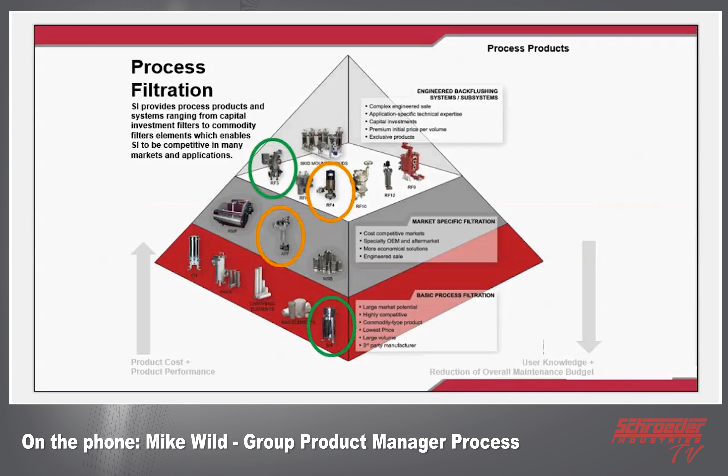So the main purpose today is just to make you aware of the other products that we have in so many different applications. Today we'll briefly go over the RF7, 9, 10, and 12. We'll talk a little bit about stainless steel filters that we have for high pressure and medium pressure applications, power booster blocks, basket strainers, candle filters.

Ryan mentioned the new PELF2, and we just had a seminar on the high capacity bag and cartridge filters that will be very important going forward, and they're much in line with the PELF2 as well.

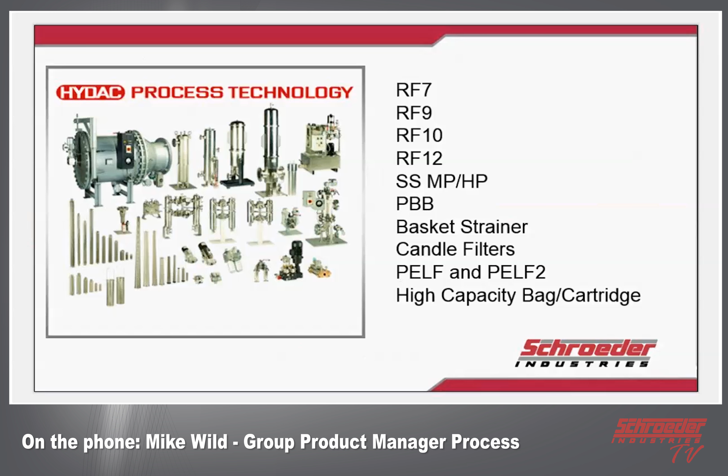In general, our process filtration area handles low viscosity fluids, low viscosity water, emulsions, anything basically below 10 centistokes. For the automatic backwash filters, we're looking at loads of basically less than 1,000 milligrams per liter. Anything higher than that, we look at stage filtration, maybe an ATF followed by an RF3, followed by bag filters to get the necessary rates.

Some of the items that we have don't necessarily fit into that mold. One of them is the RF9, designed for lube and gear oil, heavy oils, diesel, and we can do very high viscosity types of oils. This unit can range from smaller units that we put on lube and gear for central type systems, all the way through very large ones that do heavy diesel oil on marine and turbine applications.

We're also moving into hydrogen and compressed gases. There are some gray areas here with our fuels division, but in general we have GCF, which is a coalescing type filter for gas, and we're also moving into compressed gas applications, looking at different types of methane, some landfill applications before gas compressors. So we're trying to round out our division, to basically handle anything that flows.

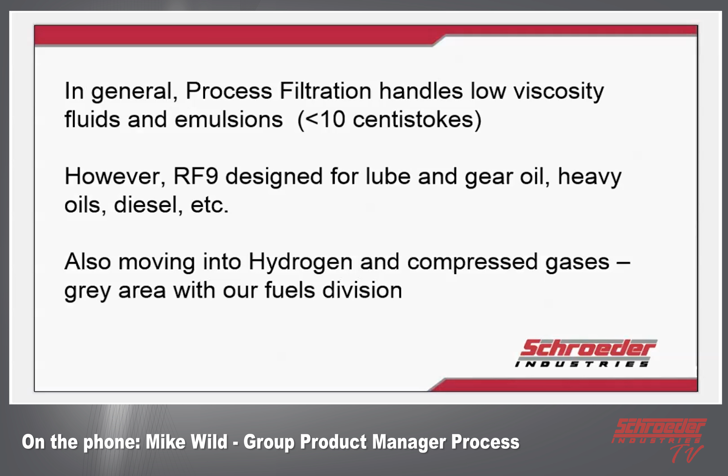To give you an overview of the variety, which a lot of you are familiar with, we have the RF3, the RF4, the RF5, and the RF7. What we want to highlight at this point, for what you may not know, is a little bit about the RF7, the horizontal filter.

All of these are comprised of the same premise of conical filtration with automatic backwashing of each filter individually. The RF7, how it differs and why you can apply it better to an application, is mainly due to its horizontal build. If you look to the top right above the gear motor, you'll see a little picture here.

It gets a little better in a few other pictures, but that is a lifting davit. The lifting davit is to help your customer whenever they are looking at a very large system, so they do not have to install an overhead crane lift, a very expensive overhead crane lift that OSHA will recommend for lifting that heavy lid. So what that davit does is save your customer money.

They can open the lid slightly, easily, and change access elements if necessary, which again is a rare experience, but it gives the customer the ability versus the cost of an actual crane. So that's one of the biggest things. The other thing about it is that it's very good for high flow. You can see the ANSI connection is on the very bottom as the inlet, and the outlet is on the side.

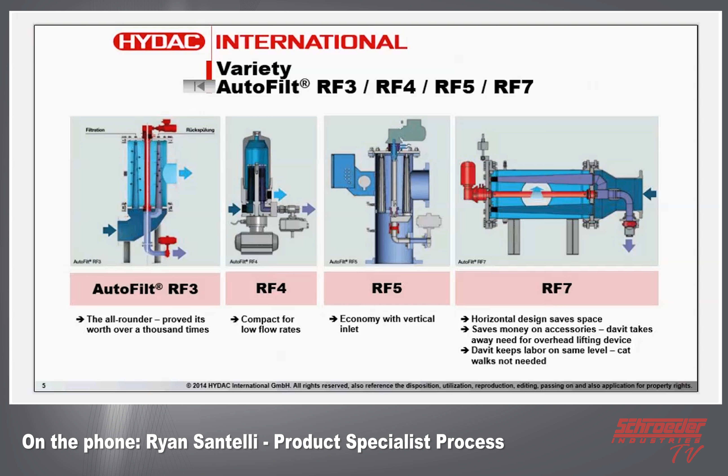Going into the RF10, this is a product that was launched a little bit over a year ago. Right now it's primarily being focused on ballast treatment, but we're going to slowly start introducing it to land applications for necessary items. The reason for it is because it has a high dirt holding capacity and dirt flushing capacity versus the RF3.

It has similar function as the RF3, except the difference is a conical jet flush technology. I'll get to that in a second, but it keeps the same theory of the conical filter element, the wedge wire from 50 to 3,000 micron. Your super mesh wedge wire is an option as well.

Your product advantages again are backflushing independent of pressure on the clean side of the filter, dependent only on inlet pressure. It's highly effective backflushing with low pressure conditions and long backflush lines. The other thing that's pretty cool about this item is that when it does flush elements, it actually flushes individual elements when necessary. It will not do a whole backflush of every single element.

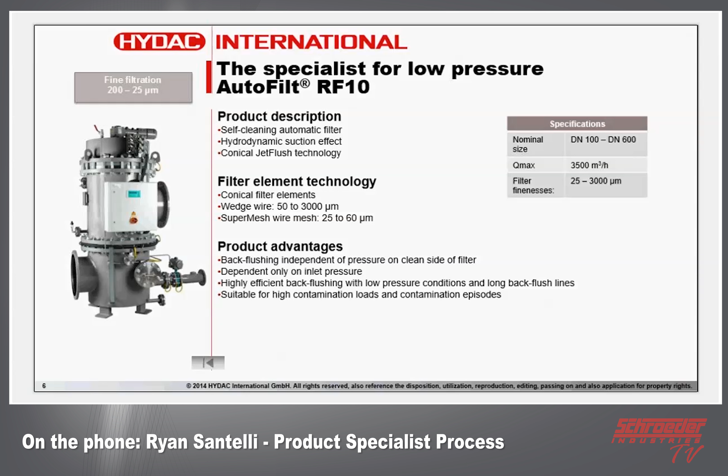Now, getting more into the jet flush actuator theory, if you look at figure D in the top left-hand corner above the filter, above the elements, that is your jet flush reservoir. So as your filter is running, the dirty water is actually filling up that flush reservoir. As your water is ready to be cleaned, a plunger actuator on top of the element will close, so therefore there will be a full suction going from the very top of the element to the bottom element, giving it close to 95% efficiency backflush.

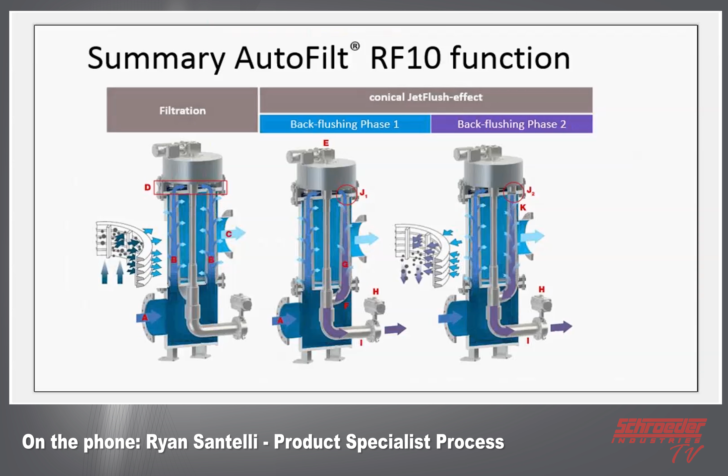This is a key term and why this would be a better product for high contamination versus the RF3. One of the big things about the RF10 is typically with an RF3 you need to maintain the pressure from the effluent to the influent in order to have a good backwash, typically 23 psi or greater. With the reservoir, the RF10 relies only on the inlet pressures.

So we don't need as high a pumping energy. We can work in low pressure applications, and this comes in very handy if you have any customers, industrially or municipal, that have any type of membrane filtration. This will work very good in those applications at the low pressure range.

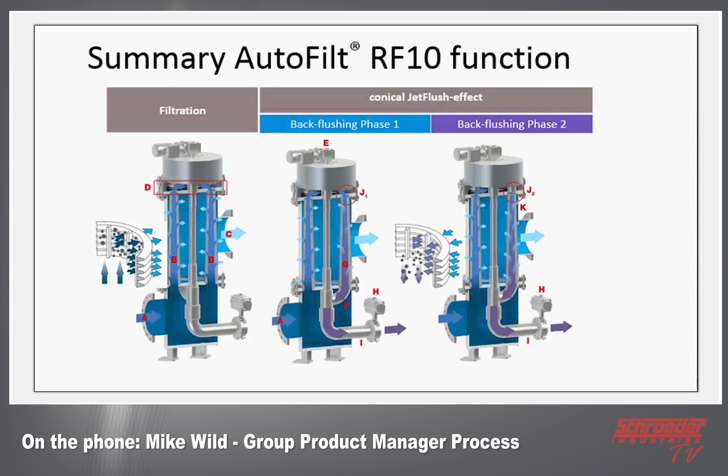Some of the applications we've done, not only ballast water was the big one, but industrially we just did a long pilot test in the produced water area. This is a field we've not been very successful with, but with the RF10 being able to take high solid loadings and have this backwash, we were very successful in our pilot testing. This has opened up another area in fracking and oil and gas on produced water that we weren't able to be involved with in previous attempts with the RF3.

Going to the industrial and municipal water problem, solids from raw water source quickly load up cartridge elements, resulting in frequent element changeout. So what we try to do is give a solution, and the solution usually will be a stage filtration, or a heavy loading on the very end, such as we were just talking about with the RF10 bag filter cartridge, and as we'll get into it, we'll see the PRFB, similar items like that.

Premature loading of carbon resin beds, inefficient use of chemicals, flocculants, polymers not affecting the proper way it's supposed to be for loading, fouling and plugging of equipment, components, nozzles, heat exchangers, cooling towers. That right there is usually why we can get into a lot of power plants and steel plants, because they're having the clogging of the cooling nozzles.

Seal failures is another huge one for us. And the costs, what are the costs that get us in there? The replacement of cartridge membranes, which are very expensive on the membrane side, that's why we are usually called in. A disposal cost of old cartridges. A customer no longer wants to use a commodity, they want to go to something that is continual cleaning and self-cleaning.

Replacement of carbons and resin, labor to change out those large elements, which you'll see we get into further along when we start talking about the new product. Chemical flocculants and polymers, equipment downtime and change-up. These are all just components of why we get into the picture and how we get in there.

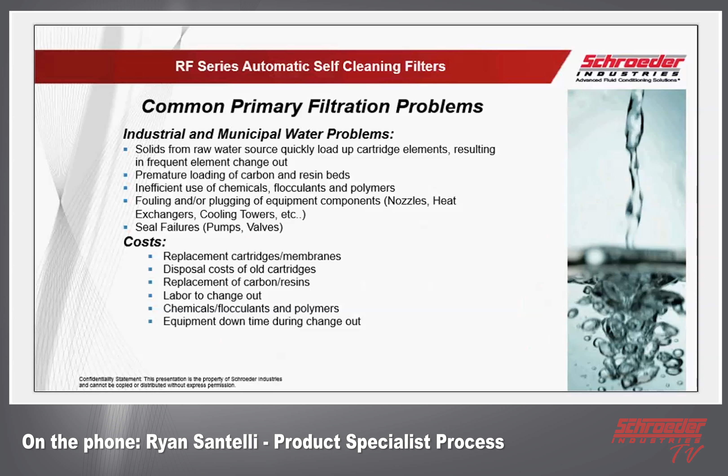This says yes, industrial municipal water problems, but as we get further, it's a very common thing for almost every application. For work and protection filtration, this is kind of where I'm talking about a stage filtration. The pre-filtration is a decisive step in the multi-stage water treatment process. So you have your intake and then you have your downstream equipment.

It has significant influence on the economic viability of the main process and after treatment.

So on the far left you'll have your coarse filtration. This is for your larger material, your feathers, your grass, things like that. Stuff that you don't want the more expensive filters further down the line to get clogged up with, or blocked, broken parts, stuff like that.

What we normally recommend is the ATF or the PRFS. Both units typically are around the 200 plus micron range, so they're your first stage. Then of course you're going to go into the fine filtration, which is anywhere between 25 to 200 micron. That's your RF3, RF10 as previously discussed.

And then of course you have your finest filtration, and that goes into the PLF that we'll be talking about shortly, that's that larger element on the left. And then of course you have your cartridge filters on the right as well. Now that could also be a bag housing, could be a bag cartridge that we'll also discuss soon here.

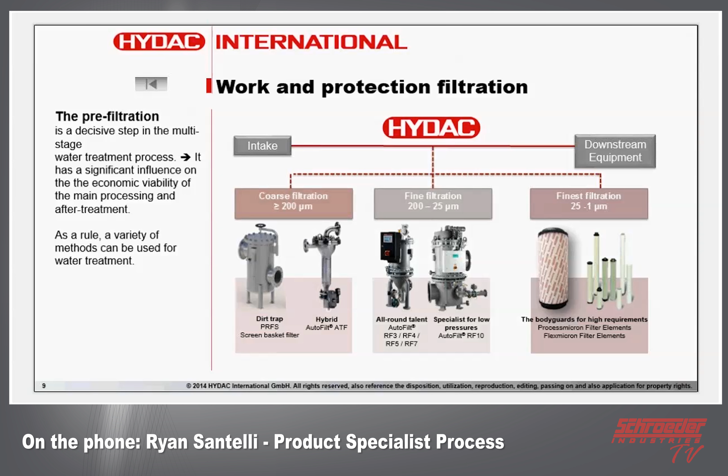There's multiple items to get under that 25 to 1, and sometimes it doesn't always stop at 1. Unfortunately, we can only get to 1 for right now. We haven't seen a real need in the market for under 1, but we were never one to turn down an application. In general, our filters are most often used as a protective or a pre-filter.

If you're in an application that's using membranes, that's quite expensive for those particular media to be replaced, so we take off the heavy loading.

Typically, if you come in for the intake, you can use the ATF much like a clarifier. A lot of applications, you'll see these big football field type ponds where the water comes in and they need that pond just for the settling. With our ATF, we're able to get high rate clarification out of it, and a number of these in series on a manifold can replace a big football field sized pond.

So the footprint is very important there, as well as the ability to get that 25 to 100 micron type of particle in the system, protect your membrane, your ion exchange, and your carbon filters, which is very expensive on the changeover. And then if you're in front of downstream that needs low fine filtration, such as reverse osmosis, they need a 5-micron cartridge filter or removal rate prior to the membrane. So we can get down to the 1 to 5 that's required in that area.

And then if it's actually a working filter, we can put in that stage filtration, that ATF, RF3, 7, 5, 10, the PLF, to get to the low micron rating required for a lot of the water and wastewater treatment and protection of nozzles and pump seals, et cetera.

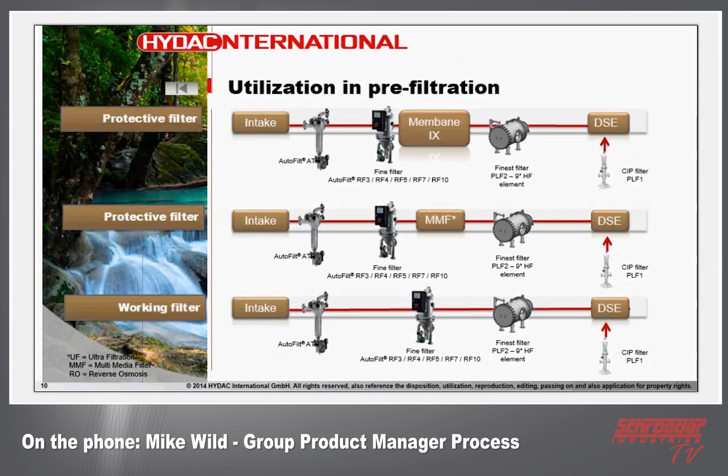Going back to the PRFS for large coarse filtration for greater than or equal to 200 micron. The product description, like I discussed earlier, is a screen basket filter. It is also available as a double filter, a duplex system, for your continuous flow and never needing to shut down. It's used as a coarse filter, a bypass filter, or a pre-separator to give you a better idea.

Now the screen basket technology is your insert basket and bracket. It's very similar to a bag housing, except you're not putting a bag into the basket. You're using just the basket filter itself.

Now a wire mesh can go down to 25 to 1,000 micron, and a wedge wire can go to 50 to 3,000 micron. Same with the perforated plate, it's actually higher, from 3,000 to 10,000 micron. But to be honest with you, we really like to keep this above 200 micron.

Why? A lot of people ask. It's efficiency. Not saying that it will not work under 200 micron, but we like to rely more on something that we know absolutely 100% has our back, and that's your RF3, RF10, PLF, and even a bag basket technology that can get under 25 as well.

The advantages of the product are high filtration efficiency at 200, like I said before, easy to operate, robust filter materials, ideal for long-term operation, cleanable filter materials, low operating costs, and this is another very easy plug and play, with very little electronics unless you're putting in a DP. And then the particles cannot enter the clean side when changing the basket.

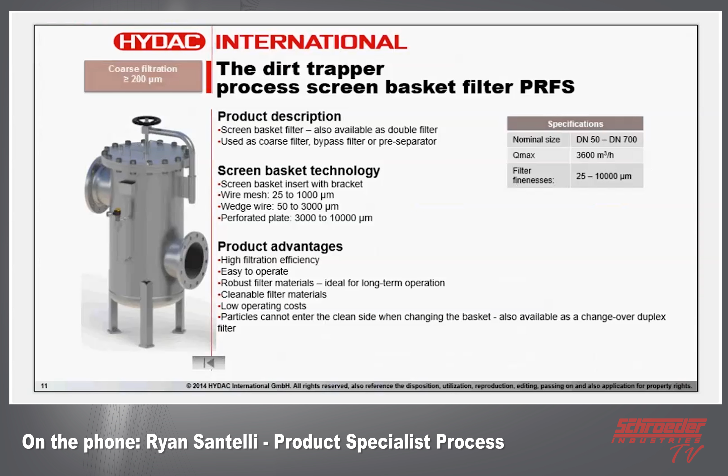So it's just an idea of what we have to offer for the larger stuff that you are unaware of. Now getting into the finest filtration, that's where we're going to work into the PMRF, and then you'll hear a little bit further about the PLF.

The candle filters of a PMRF - this is your melt blown, your pleated material, your standard spun spray material. These are your cartridge elements that basically allow people to use a cartridge filter versus a basket filter for finer filtration.

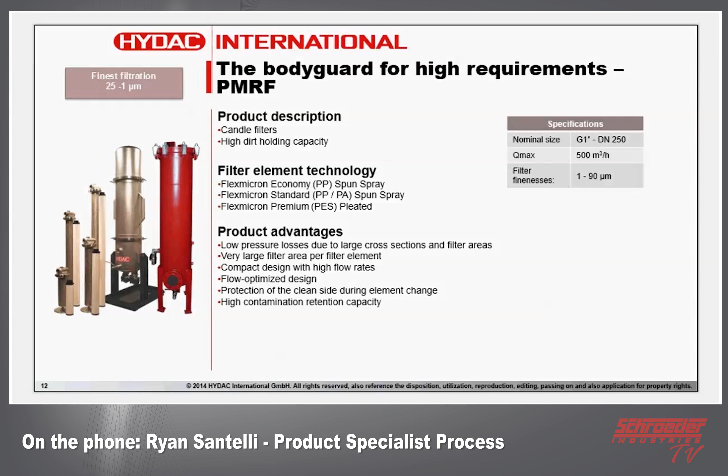Now the product advantages: low pressure loss due to large cross sections and filter areas, very large filter area per filter element, and these can go up to 40, 60 inches at times. Compact design with high flow rates, flow optimized design, protection of the clean side during element change, and high contamination retention capacity. The basket filter, the cartridge filter, the bag housings we're showing here are really industrial strength type situations.

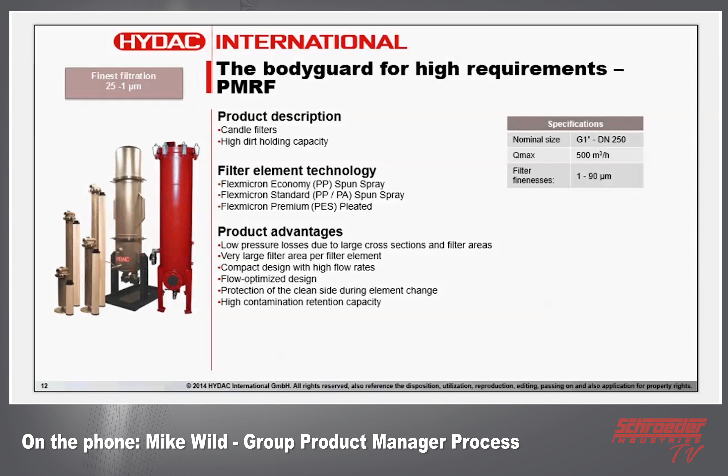We also have, if you're in price sensitive situations, the more economic side of it as well. So we really need to know the situation, how it's going to be used, and the price sensitivity of the project, so we can guide you in the right direction of which product should be used for that particular application. And here we start talking about the new product.

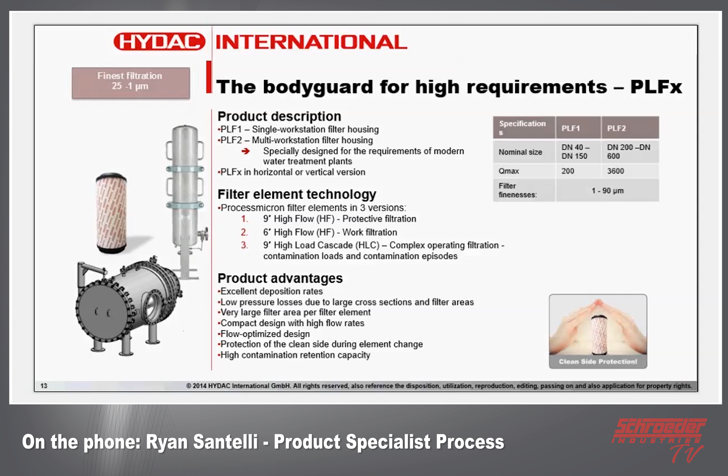Basically, there is no cross-contamination when changing these elements, and that is what can really get you for the really intense applications that do not allow that at all. If you're involved in any type of parts cleaning applications, this is what's really required, because it will not allow downstream penetration, and we can get very low, down to 1 micron rating.

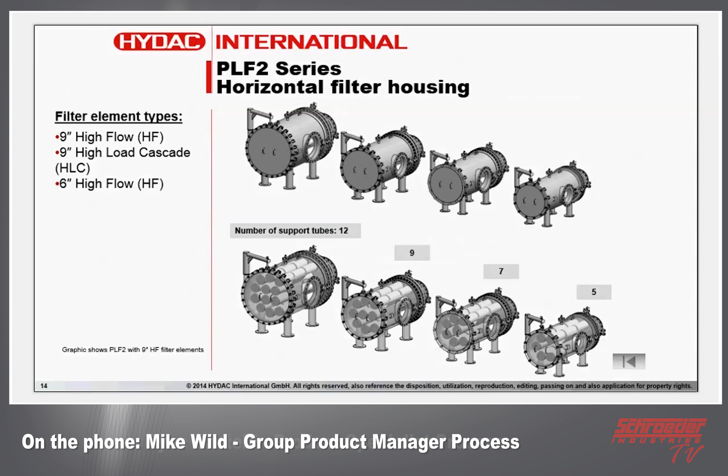So this is kind of what would be a standard production item. You have the large to the small, and as they go from large to small, what's inside them? In the very largest one, you actually have 12 support tubes. On each support tube, you have 3 elements. So you do the math, 3 times 12, and that's how many elements you're going to need for each large housing. Now then you start working down, you've got the 9, 7, and 5.

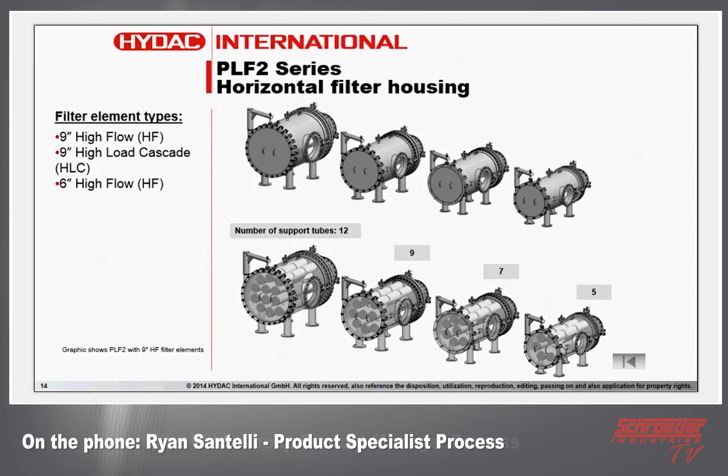Again, these are all dependent on your actual flow, dirt holding, dirt contaminant, stuff like that. So again, this gives you the 3 different filters on each support pole, and then you see the cap on the top that screws in and holds those filters in, so there's no way they can be popped out or lost. Just like the RF7, you can see it has a lifting davit - this will help the unit open and close and change the elements.

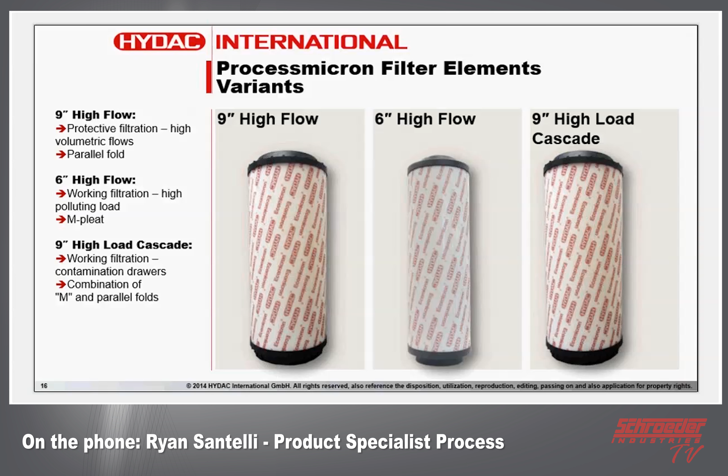So again, to go back to the element technology, you have the 9-inch high flow, the 6-inch flow, and the 9-inch high load cascade. Now the 9-inch high flow is protective filtration of volumetric flows in parallel fold - that tells you about the pattern inside the material. The 6-inch high flow is your high polluting load with an M pleat. And then of course your high load Cascade, which is for your really heavy stuff, is your contamination drawers - a combination between an M and a parallel fold or pleat.

So what are all in all these layers, is your question here. Well, there are actually 6 layers altogether. 2 of the layers are drainage plant, and that's your front and your back. And then you have your protective fleece that goes right after both of those.

The water hits the pre-filter first, and then it hits the main filter, capturing the dirt and keeping it inside to prevent contaminant from reaching the other side and going down the clean side. It's important to protect against having no dirt going to the clean side at all.

Even when changing this element, there is a design so it prevents any cross-contamination. The O-ring cap, the filter media, and the outer sleeve are also very important, but the O-ring caps and end caps are designed specifically so they fit and fold to each other. As you saw in the design, on each support tube you have 3 of these elements.

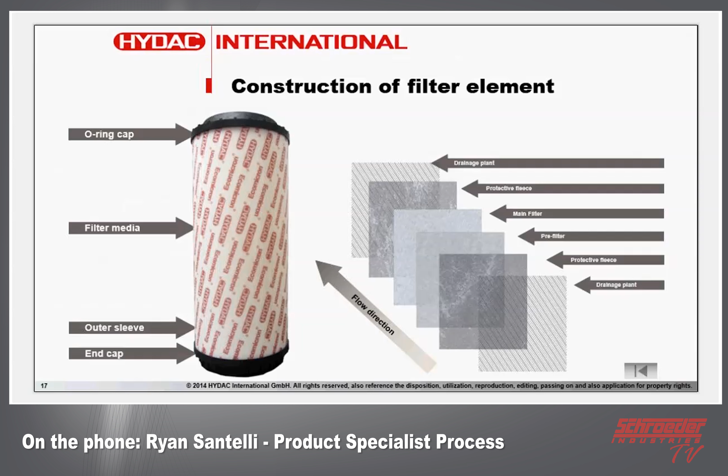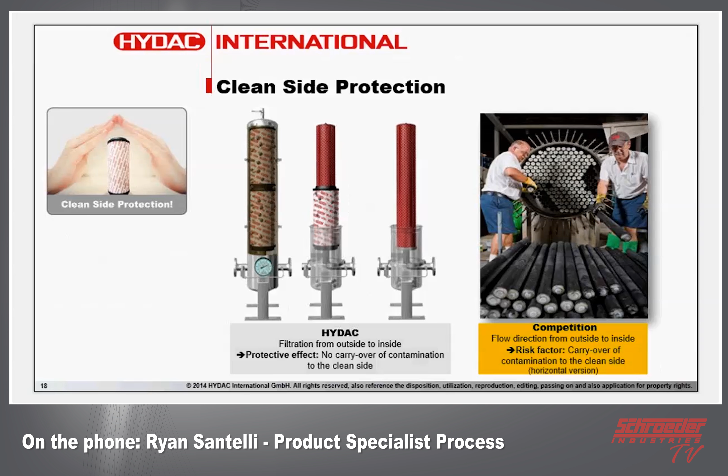And they're doing this multiple times a week, and it takes hours to do this. Changing out these elements, or this housing, only requires 1 person, even with the multi-housing units, and it doesn't take as much time as these hundreds to 500 cartridge elements.

In general, as we stated, we really are a protective filtration for other units, especially if you're looking at ROs - reverse osmosis type of systems. Every reverse osmosis system has to have a 5 micron or lower cartridge type of system up front. So depending on the flow, they'll get very large.

We had one customer that designed their cartridge filters, expecting them to be replaced every 2 months. The dirt load was so heavy, they replaced them every 1 to 2 weeks. We came in and gave them an RF3 up front to take the heavy dirt load off the cartridge, and they went from 1 to 2 weeks to 6 month replacements. Just the labor costs involved with those replacements were enough to justify the RF3 up front of the system.

We'll be going back and talking to them about the PLF2. They now want to get rid of even that 6 months to replace those cartridges, down to something manageable with the PLF, so they can actually extend that to 10 to 12 months. And when they do replacement, it's very quick - replacing a quarter of the number of cartridges they're doing currently.

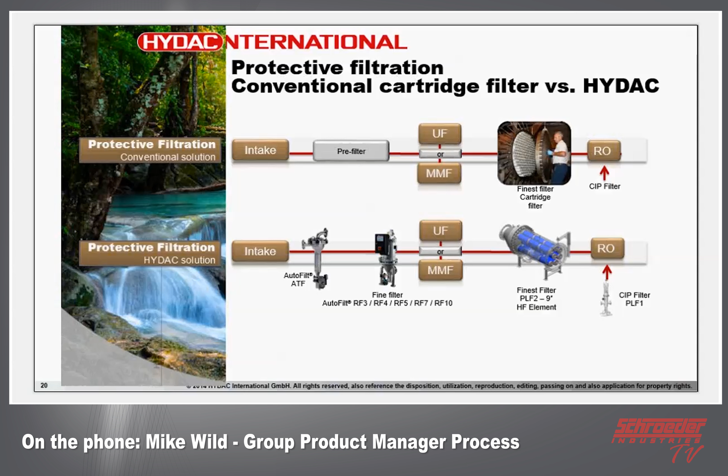Real quick too, as you can see above the ATF and the RF3, it says pre-filter. That's going to what these customers are using. This can go from a basket strainer, a screen strainer, even if it's just a screen in front of a pipe. Basically, this is what we're doing.

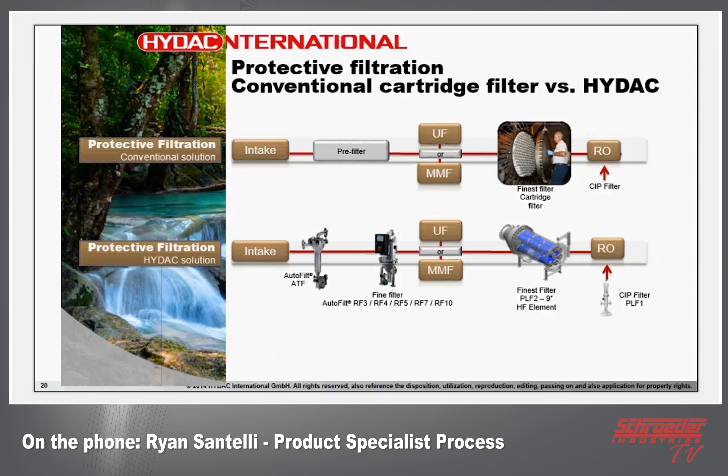A lot of these people have RO systems that aren't prepared to take on the heavy solids up front, such as the ATF we discussed earlier. That's kind of what we're going after. And even if they do have an automatic filtration system, we can be very competitive even after that filtration system, and still work with them using the PLF, depending on what kind of system they would use.

And in our previous Skype type of meetings, we presented the RF12, the RF9, and the GCF. The purpose for today is just to let you know what other areas we're expanding into.

The RF4 and RF12 are basically for machine type oils, low flow water. The RF9 is designed for any type of diesel, heavy fuel oil, any type of oils. We're looking at using it for even WD-40 recycling at this point, and it's a unique way that we use compressed gas to push it in, so we're not wasting a lot of the clean oils that are going through.

We're looking now at using this for central type of gear lube oil that can be passed through it. The nice thing about it is we can get down to low filtration rates, typically around 5 micron, whereas with the RF3 we were basically at 25 or greater.

We're also developing the GCF. We're looking at a lot of different gas opportunities now - compressed gas, turbo compressors, dry gas seals. Our GCF is a coalescing type of filter. We've also developed in-house a number of filters that can do things such as wet methane.

At places like landfills, there are now new rules and regulations that don't allow them to burn it off. So they're taking that gas and passing it to a gas compressor to get energy.

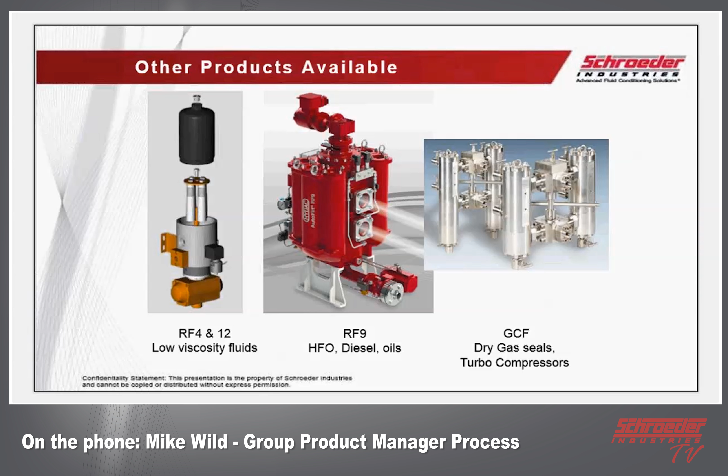Just to make you aware, if there's something that flows with a low viscosity, please let us know. We're trying to fill in some of the voids we have in our system, and we're trying to make partnerships with other companies so we have a complete filtration line.

Just to give you a little background on the filter on the far right, the GCF. As you're all familiar with our coalescing capabilities, the purpose and definition of coalescing is the removal of water. This unit basically coalesces the gas into a dry gas, removes the water from the gas system, and drains it.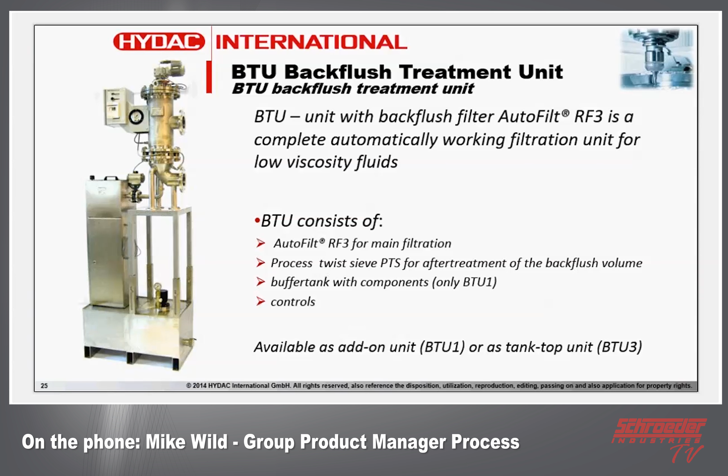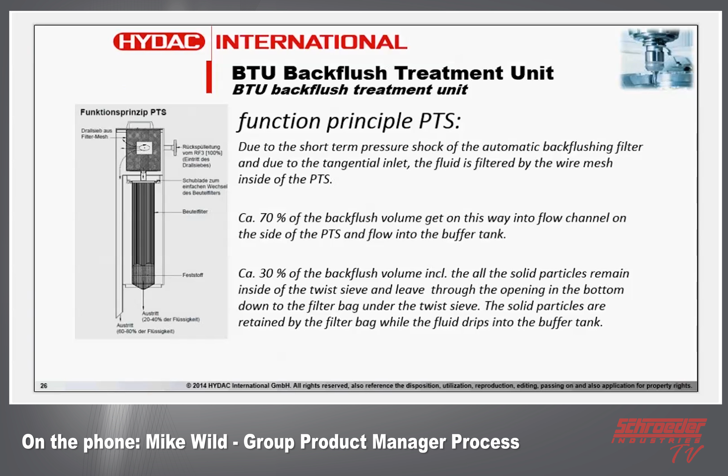If they don't have somewhere to put the backwash, we can offer this BTU backwash treatment unit to them. The basic principle is it goes through a sieve type system. Most of the backflush gets channeled off this way and sent back into the buffer tank or waste stream, but about 30% of that is condensed down, so they don't have as much backwash or backwash sludge to deal with. Most of it's retained in a filter bag that they can get rid of.

So basically, there are all kinds of other products available. We could probably sit here for a couple more hours and describe each and every single product that HYDAC and Schroeder can offer. But to give you a general idea, give us any form of a flow or pressure, and we'll come up with a filter. We'll do our very best.

Basically, we're telling you that we're open to all suggestions you have for flow and filtration when it comes to a process line. It doesn't always have to be water - it could be an emulsion, it can even be fuel, depending on what kind we'll find an application for. And if we can't do it, we've got a lot of different product lines that can work with it as well. As Ryan said, the possibilities are endless.

So we have everything from pre-treatment to snow blowers at a ski resort, to RF3s in the basement of hospitals cleaning their water as it gets passed on. As long as it's a low viscosity and it flows, we'll be able to put some type of system in it. As I mentioned, we're working on developing relationships.

If you have a customer that has reverse osmosis and needs new membranes, we're forming a partnership that can help you get a very competitive price on reverse osmosis membranes and help replace them. We're working on different partnerships for different types of equipment to round things out. A lot of times we didn't have a complete system, we had components, so we're trying to get more into being able to give you a complete system or at least more options for your filtration needs.